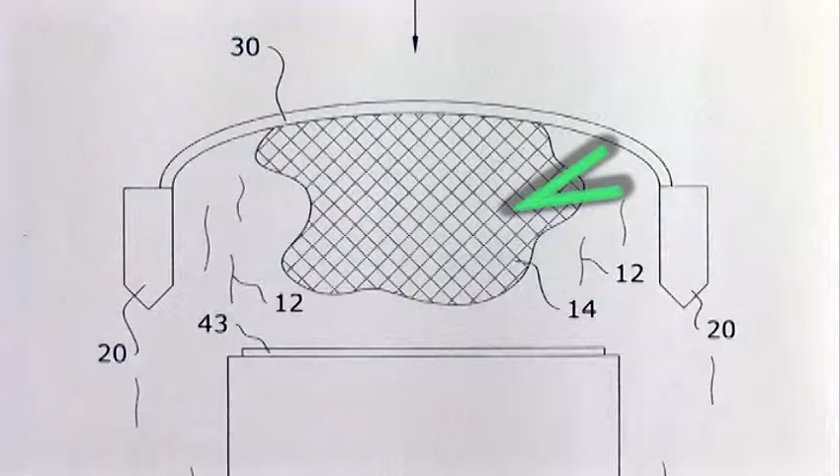The title of this video is A Method for Recovering Oil from Water. I will describe this method by referring to a couple of drawings. The first drawing shows oil that has been skimmed and is contained within a skimmer. This skimmer is attached to two boats that move the skimmer toward a barge.

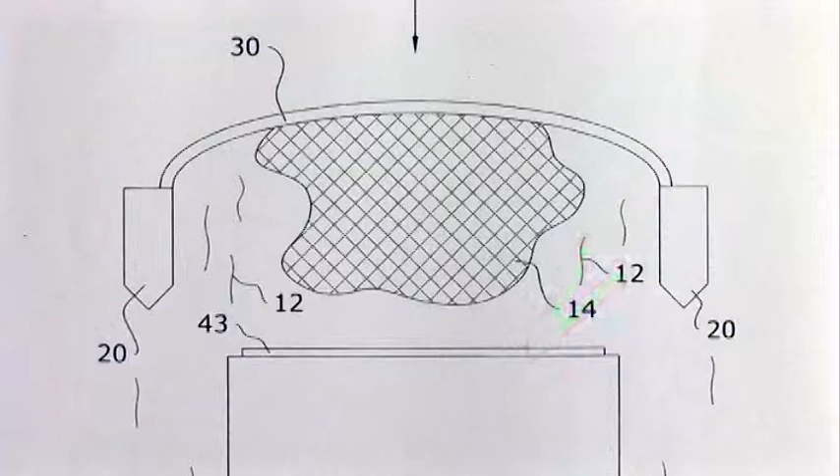As the boats move along each side of the barge, the skimmer moves up the ramp that is extended from the top of the barge to a few feet below the water surface. The next drawing is a cross-section of the barge that shows the skimmer on the ramp, two baffles that are located inside the barge, and a pump that is located in the bottom of the barge.

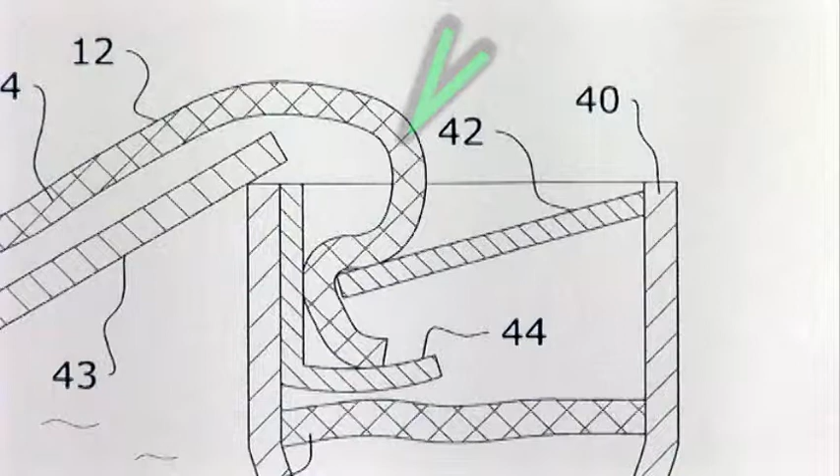As the boats continue to move by each side of the barge, the skimmer moves to the top of the ramp and deposits oil and water into the barge. The skimmer then moves across the top of the barge, down a ramp, and back into the water.

The oil and water that are deposited in the barge fall on the top baffle, run down this baffle, seep through holes onto the lower baffle, and then into the barge itself. These baffles prevent the oil from momentarily sinking below the surface of the liquid in the barge. The top of this liquid is maintained at or slightly above the lower baffle.

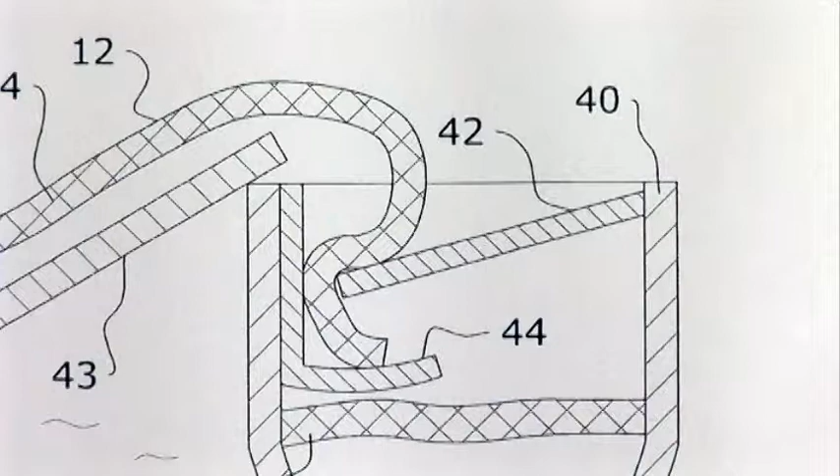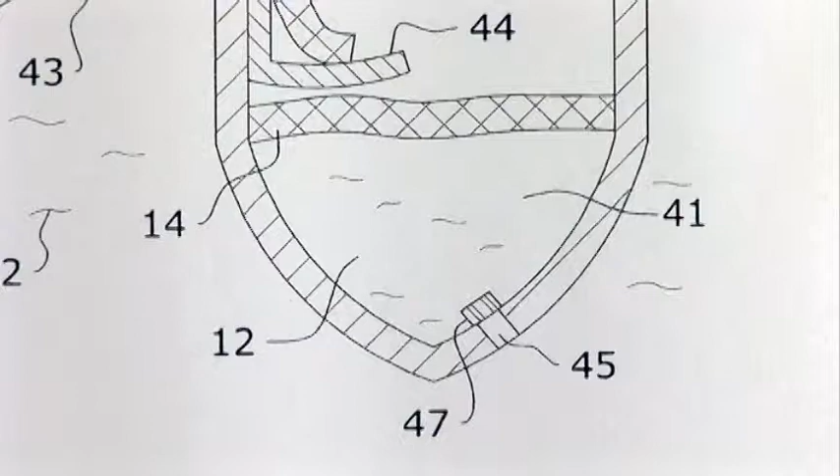As skimmers continuously deposit oil and water into the barge, the pump continuously pumps water out of the barge. To prevent the oil layer from reaching the pump, there is a sensor that stops the pump when the bottom of the oil layer reaches a given point. This process does not need special equipment to separate the oil and the water. This separation takes place naturally because oil floats on water.

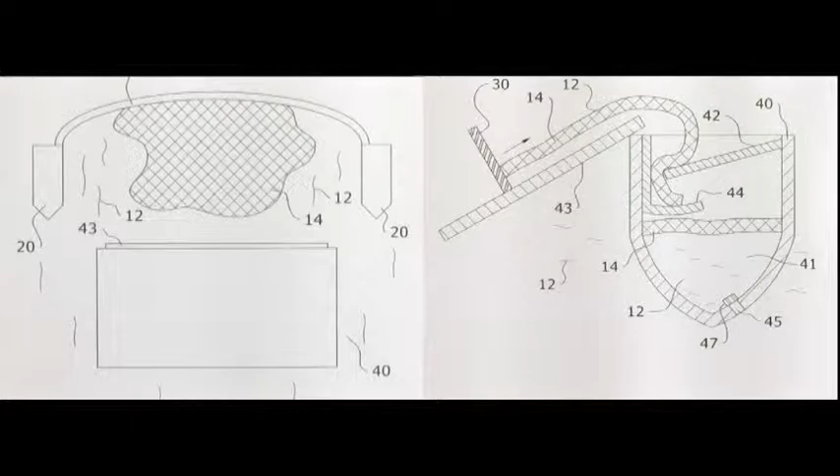These drawings illustrate the basic concept of this process. However, on a large scale, several barges would be connected to one another to create a recovery station. This mock-up, which consists of 6 barges that are connected to one another and has ramps on opposite ends, is an example of a large-scale recovery station.

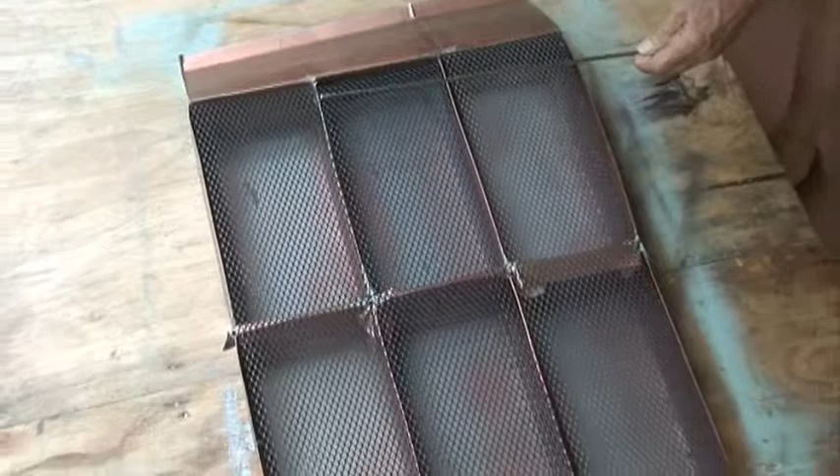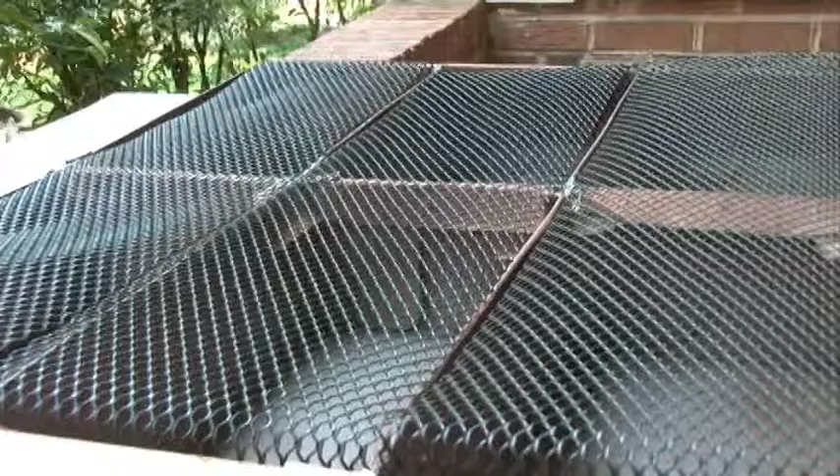As the skimmer moves up the ramp, deposits oil and water, then moves across the top of the recovery station, another skimmer can begin to move up the ramp. Since the skimmers return to the body of water by moving down a ramp on the opposite end of the recovery station, skimmers can continuously deposit oil and water. The pump is continuously pumping water out of the recovery station.

Now I will demonstrate this process. This pool represents a body of water, and these rods represent 2 boats that will move the skimmer up the ramp and deposit oil and water into the barge. The barge contains a siphon that siphons water from the bottom of the barge. To simulate a skimmer that has skimmed some oil and is approaching the barge, I will pour some oil between the skimmer and the barge.

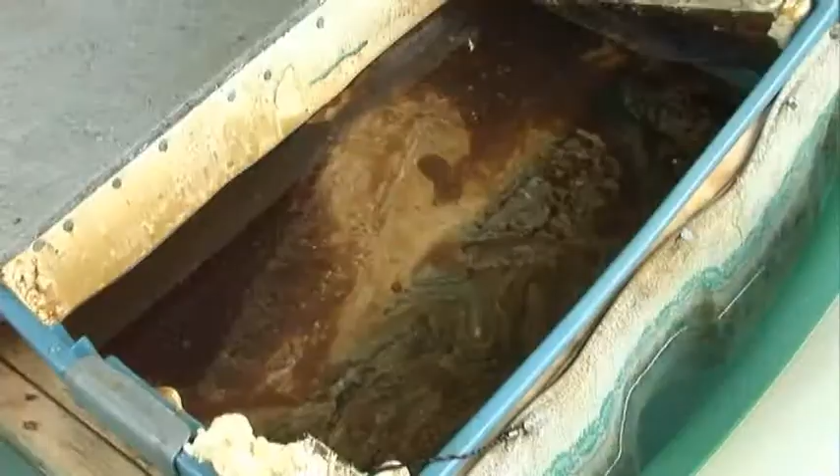To simulate the boats moving the skimmer up the ramp, I will pull the rods to move the skimmer up the ramp and deposit oil and water into the barge. As you can see, no oil is lost as the skimmer moves up the barge. This is a view of the oil and water that has been deposited into the barge. This is a view of the clear water as it is siphoned from the barge.